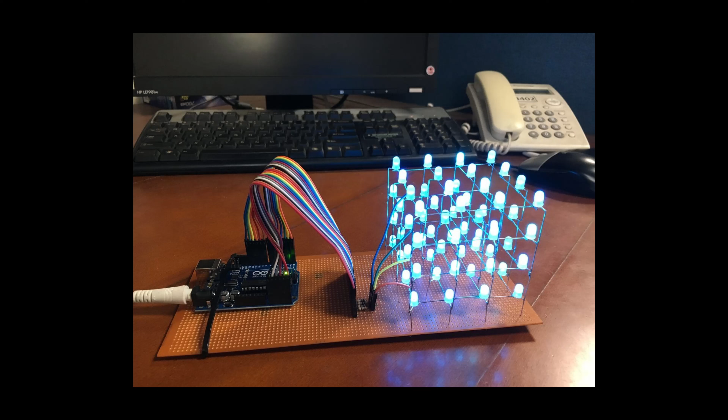So now we skip ahead to the early 2000s, and we look at the emergence of the maker movement. With the beginning of the RepRap project, as well as laser cutters and CNC machines actually being able to be placed inside your garage for us mere mortals to buy, suddenly the maker movement began. I'm not even talking about Arduino processors and being able to code your own little chips.

But with that, there was a vacuum: we are able to produce all of these things, but how do we sell them? Before, you sold to your local community, but these days the local community looks outwards, they look elsewhere to buy, so it's much harder to reach only local communities. How do you reach a global audience?

This is where in 2005, Etsy took over that vacuum and provided a platform for actually selling the products you produce in your garage. For those who don't know what Etsy is, it's a platform on which you can sell stuff - stuff that you produce, draw, cut, make, design, whatever. It's super decentralized, and you are your own factory, basically.

For years, Etsy has been a place where creators sell their handmade and unique products, helping small makers turn their crafts into actual real businesses. But it also came with a lot of cost and work. Making every item by hand is really tedious. Managing orders is hard, and dealing with shipping requires a lot of effort. All of this put a lot of strain on the designers.

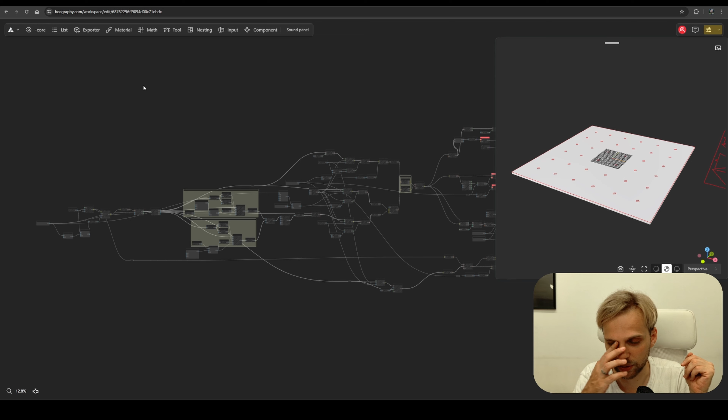You as a designer, what do you do? So if I go to the editor, I have one design right here, and it's a sound panel. You can actually hear that the acoustics in my office are not great, so I just decided to design a quick little sound panel. I'll guide you through the whole process here, but this is how it looks like, right? That's the script, that's the logic, and that's the output.

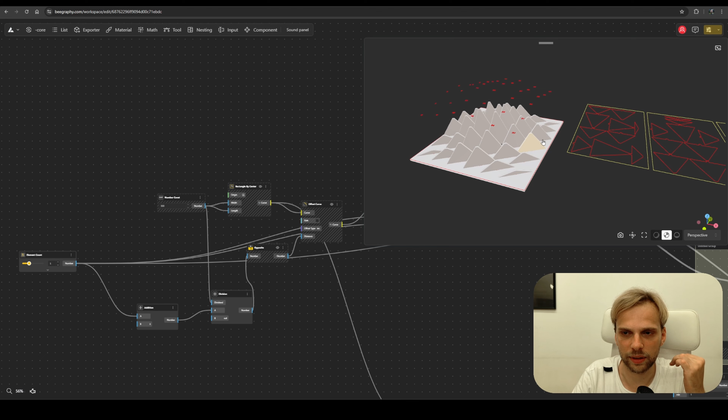So if I look at it here, these are all of the different parts, right? These are all of the different parts that are ready to be laser cut for the panels. And there are a few things that I can change.

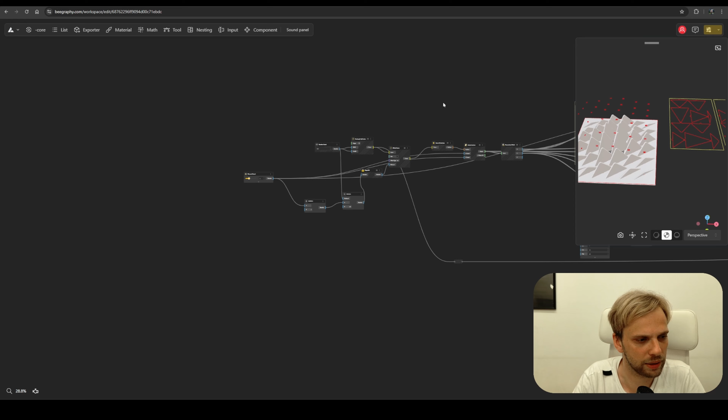Before I show you how the product would look like, I'll guide you through the script really quickly. I'll probably just place the link to the script in the video description below, so that anyone who has a login for this platform will be able to see the script, and dig through this mess that I made.

But basically, all I do is create a rectangle, which I divide up, and actually let's do a stupid thing, and let's hide everything. And now I won't be able to know what's where, but that's fine.

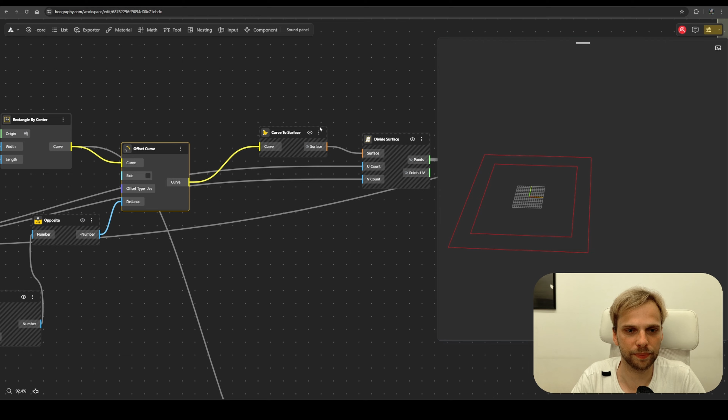So I make a rectangle, I offset it inwards, I create a surface from the offsetted rectangle. I divide the surface into a grid of points, and I deconstruct these points into their x and y axes.

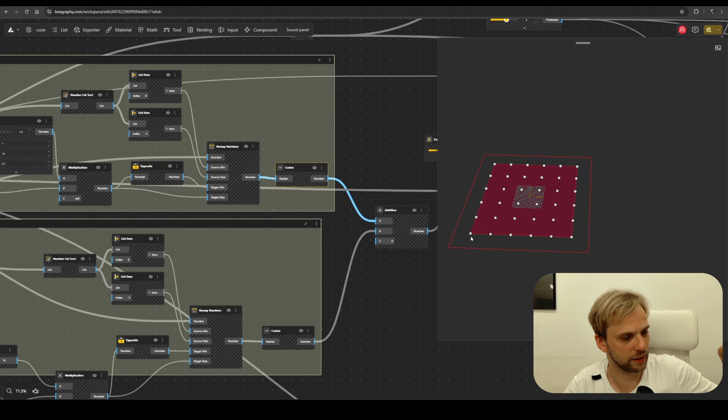And the reason why I do that is because as the points are moving further away in the x or the y axis, I run it through... where is it... a cosinus wave function, right? So I basically remap the numbers that I have here, this range of numbers, to be a cosinus. You know the wavy line, we do the wavy line.

And I add up these cosinus waves in both x and y direction into one number, and I use that number to produce a z vector, an upwards vector, with which I move the points up. And I get a little hill thing.

Then some shenanigans right here where I draw a line that I can't see. What the hell? Oh, my bad, the line is pretty small. It's right there at the top, hope you can see it.

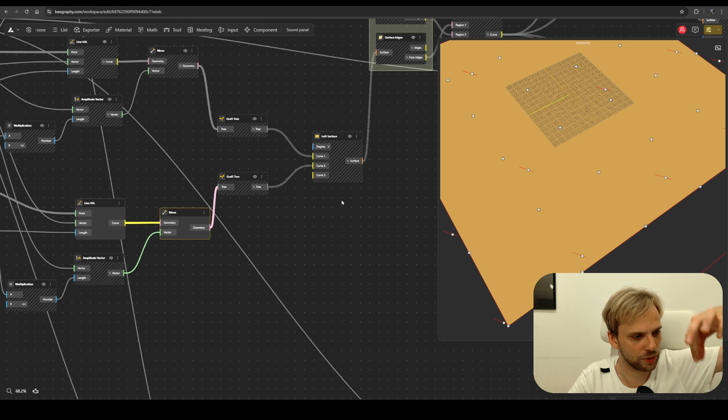I draw a little line, I move it to be in the center, in the middle of the point. That's going to be the tip of the triangles, the fins, right? And at the same time, I draw a line at the bottom, also move it to the center, and I loft between them, right? So I have this little pyramid.

Once that is done... I guess I could talk about this. No, let me just explain it right here.

I also make little rectangles so that I can place them inside of a plate, right? And the problem is that I have one region here, and two parts. I actually want this to be one shape, one outline. So what I do is I use region union to union them together into one.

Let's hide a bunch of stuff that is in the way. There we go. So I have my region union here for every one of these, so I have my elements. Great, those are ready to be laser cut.

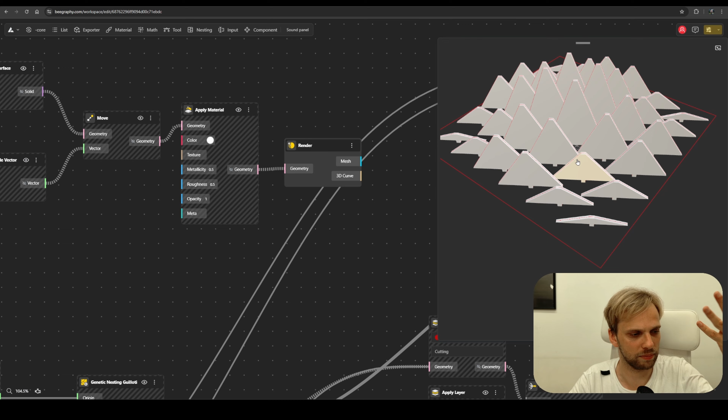Well, not really, they need to be placed flat on the ground, right, to be laser cuttable. So I'll end with this part here, just showing the elements in their correct place. It's basically just extruding the surface, like thickening up the surfaces, and I believe capping them. No, it caps automatically, never mind. Okay, so that is one part.

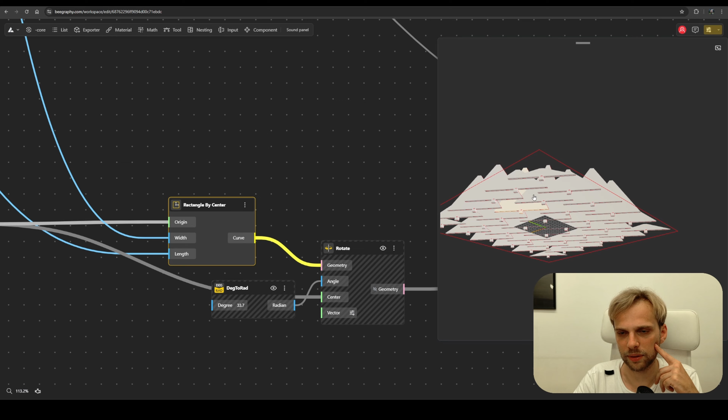Second part is me taking a bunch of rectangles that you can see right here. Actually, I kind of need to hide this, apologies. Hide that.

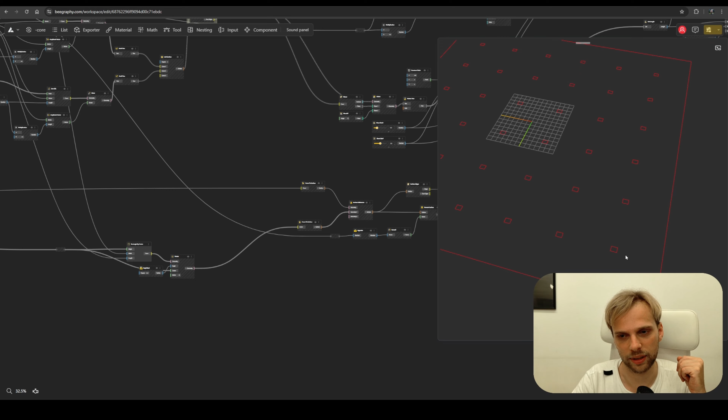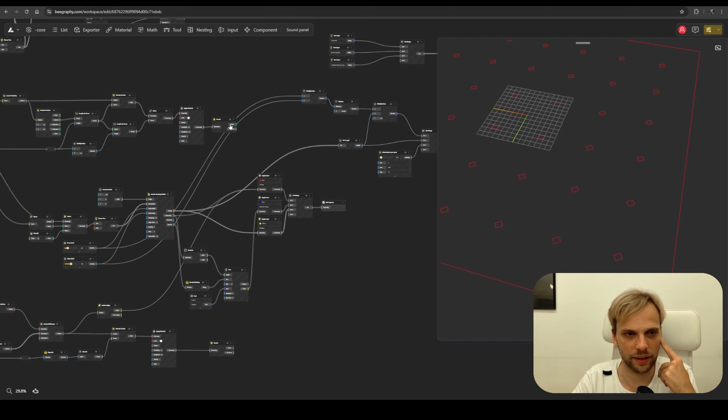Hide all of those. As I said, browser-based stuff is not that fast, but it's chugging along. So here, for every point on which the little triangles were sitting, I also make a little hole, and I make sure that it rotates exactly the same amount as the triangles, or the elements, were. Notice this rectangle rotating, and bam, it aligns with how the triangles are rotating.

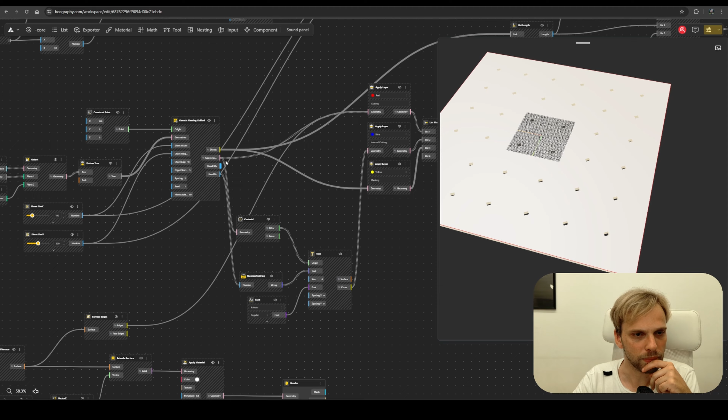With that done, also some extruding shenanigans, and at the end I have my Swiss cheese plate. Let me hide unnecessary stuff. There we go. So that's two - I have my base element and I have all of my elements right here.

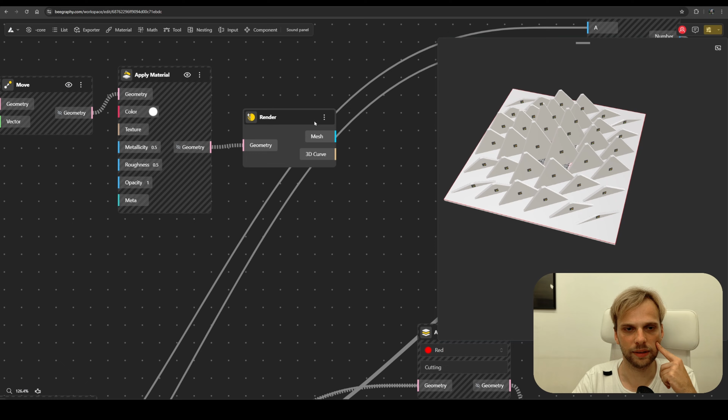Then what I do is I take the curves of the outlines of the triangles, get their planes, and orient them to the world XY plane. If I hide and render here, and hide this, you can see this is basically all of the elements just placed on top of each other on the world XY grid.

And then where am I? Hello, I'm lost. Oh yeah.

And then I just use a nesting tool, which actually is available as a plugin to the general editor, which is amazing. So now you are able to actually produce plugins for the editor itself. In my opinion, these kind of platforms live and die by the community and the plugins that the community are able to produce.

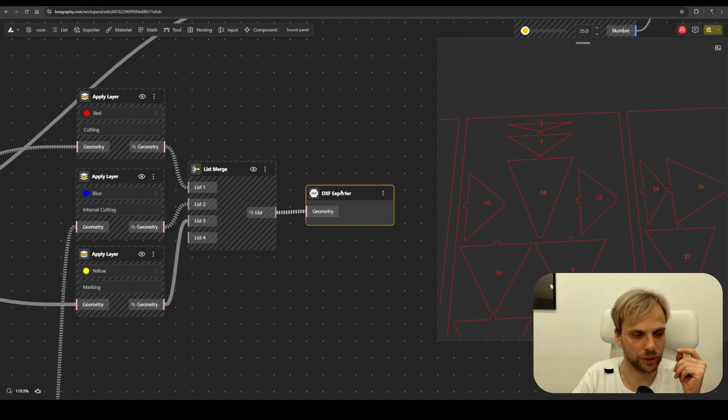After nesting is complete - it's a very basic, bounding box based nesting tool, but it does the job - I also produce numbers for every element, placed into a different layer. The cut layer is red, the internal cutting layer is blue, and the marking layer is yellow. All of that feeds into the DXF exporter, which I'll talk about later - this is basically you determining what can come out from your model, and that's the DXF file, the laser cut file.

Okay, let's hide that. I believe that's kind of it. The last bit was for every element, I also place numbers above it so we can see which element is where - element 0, 1, 2, 3, 4, 5 - just so it's easier for us to assemble them.

So now if I want to look at how this whole script would look for a user, a client, a person who wants to purchase this design, I can go to this - I believe it's under demo, because configurator - first let's talk about configurator. In the configurator, I enable or disable inputs that I want the client to have access to.

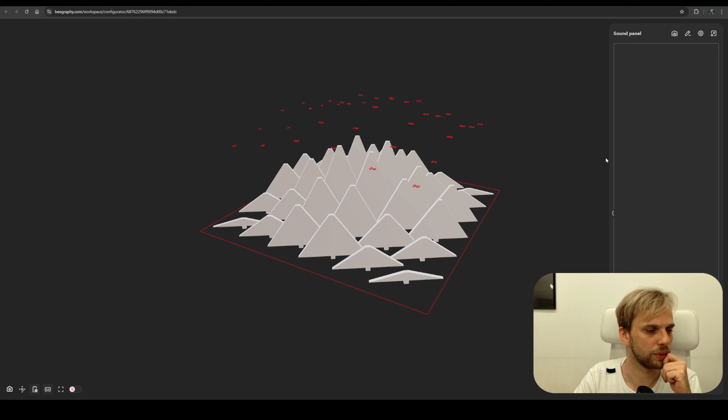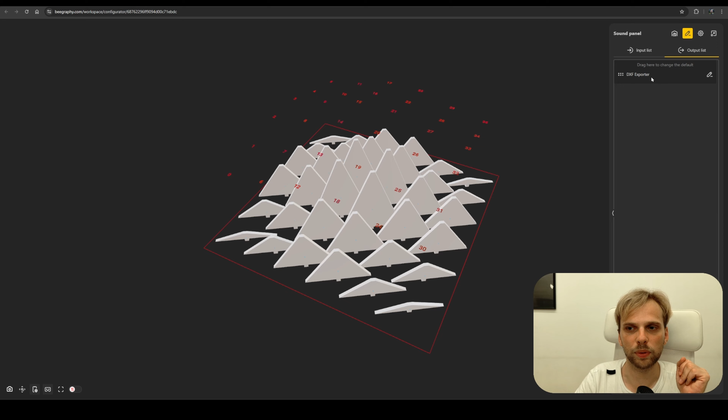So here, it's still loading. No, it's not. Here are all of the different inputs that the client has access to, and I can choose to enable or disable some of them. In this case, all of them are already set up, I don't want to mess with that. There's also an output list, which is one DXF exporter. Oh, I also forgot - actually no, I'll mention that a bit later.

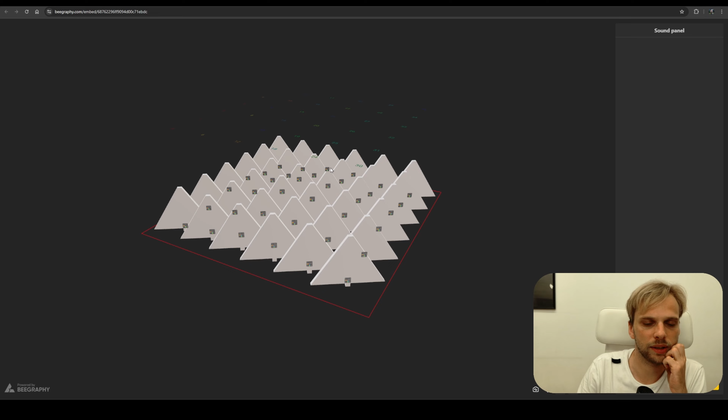So then what the client sees is this demo thing. Let's wait for it. You can notice that whatever you have enabled as a preview in your script also shows here for the client. So this is maybe not the best.

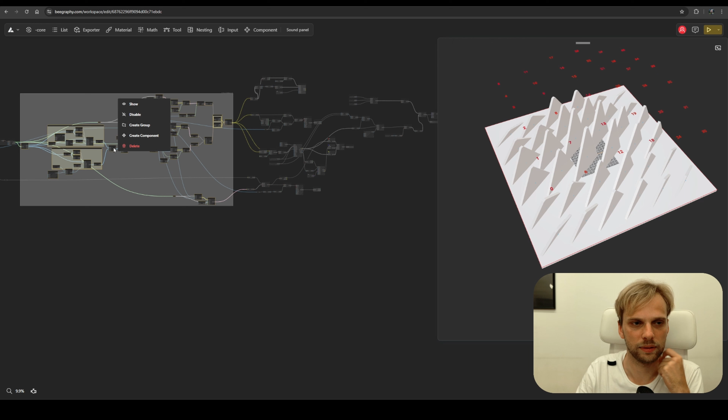I actually need to go back in here and enable the render preview of the bottom and disable - apologies, a bit laggy. Oh, did I? Oh, I accidentally enabled all of the whole damn preview. Okay, good, a bit more. Okay, whew. And then we don't need to really see that.

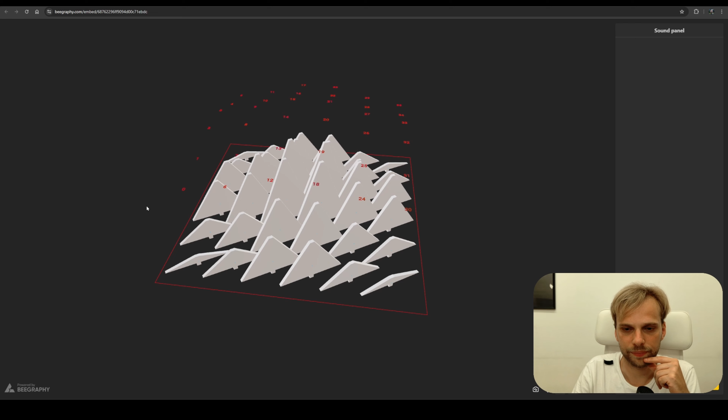Texts currently in this current state are really heavy, so we don't want to preview those. Back in here, if I refresh the web page, you'll see that a cleaner version of the geometry is being shown.

And if I were to click on the download right here, you can see that the DXF exporter is right here - that's the node I was talking about. Where is it? Right here. That's the only output that the client can get. And if I click done, then the file gets downloaded.

I'll show you the file in just a second, but right now give me a second - I will need to figure out why the inputs are not showing up. Also, I actually need to hide my camera and show you again. Download button was here, DXF exporter. I clicked done, right? Okay, let me investigate.

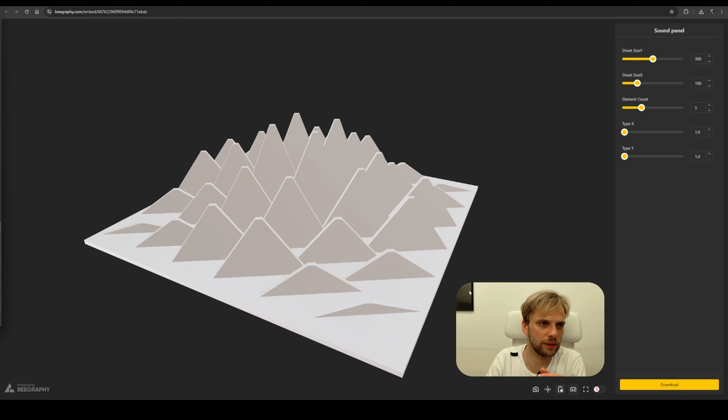I figured it out. Let me make this smaller. The problem was that if you hide your sliders, your number adjustments, inside of your script, then they will be hidden in the sound panel too, which is strange, but hey, it behaves this way, so we follow the rules.

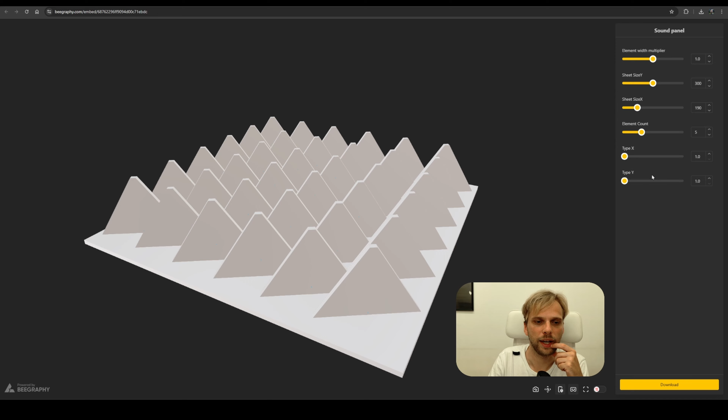Either way, we have ourselves a bunch of things that we can change. For example, if I simply go for the element count - give it a second, because of the nesting logic - or 3 divisions, not elements. Because of the nesting logic, it's actually a pretty heavy script, but seems to be working quite well. If I want more elements, I can. Let's go for 8 - I don't want to do like 12 elements, it's going to take too long.

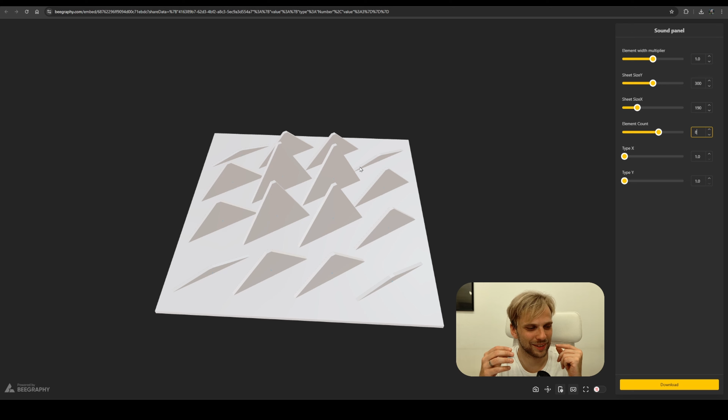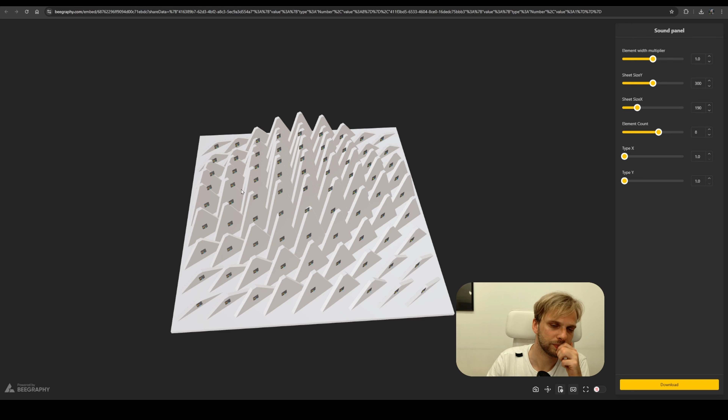So now let's give it some time to catch up. You can see the step-by-step script being run, and how it calculates, eventually converging on the final design. There we go, so that's our 8x8 sound deadening panel.

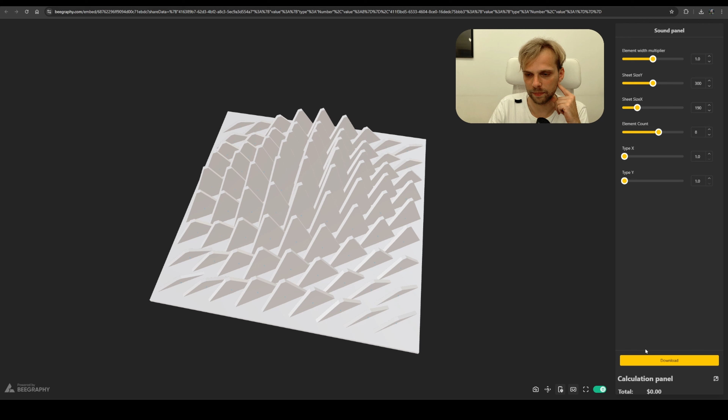Now here in the bottom left and bottom right there's a bunch of settings and icons. The one I want to talk about is this icon right here, the calculation panel. This is soon to come, in a way that you will be able to assign a material and material cost to this model, and the calculation panel will give you the rundown of how much it's going to cost.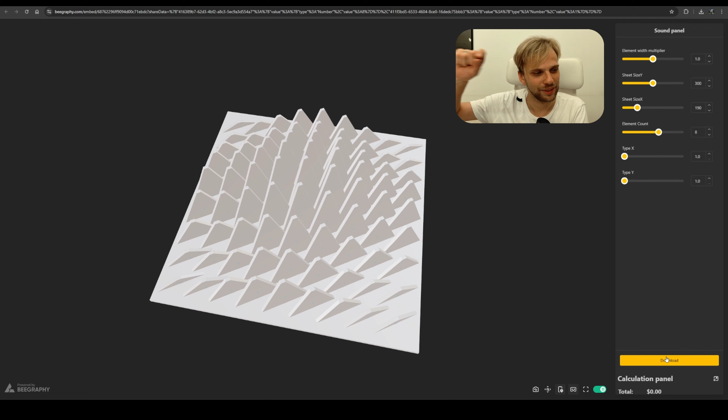The marketplace will automatically update the cost according to the type of design that you make or that your client wants. I think that's one of the last things. The last thing would be to bridge the gap between this download button and the file actually being sent to a makerspace near the client's location, for them to produce, package, and ship the model to the client.

So now, since the calculation panel isn't running, I'll show you a quick workaround. The workaround is right here - the display table, this bad boy right here.

If I enable the preview of it and refresh, give it a second... there we go. And once it calculates - yep, there we go. That's the total area, how many sheets are required, and material price per square meter.

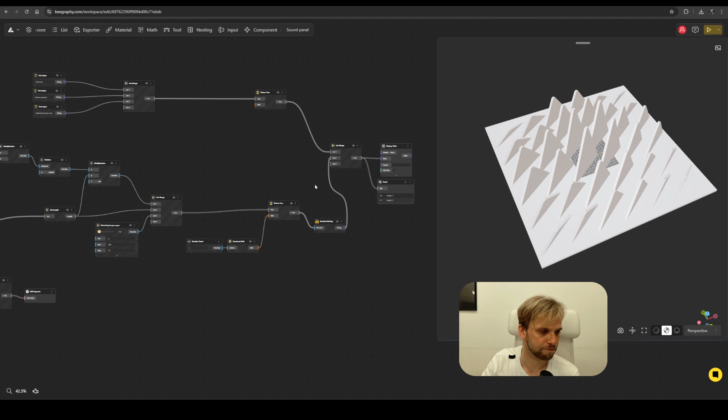What's the cost for it? All of it is running through this logic of building up the table. Right now it's a workaround, but in the future you won't need to do this kind of stuff because it's all going to be in the calculation panel instead. There are plenty of tutorials by Beegraphy themselves on how to use this.

All right, so finally we're at the stage where I can actually make the thing I've been talking about making. We always make things on this YouTube channel. So now I'm going to play around with the settings for this, and try to find a nice little...

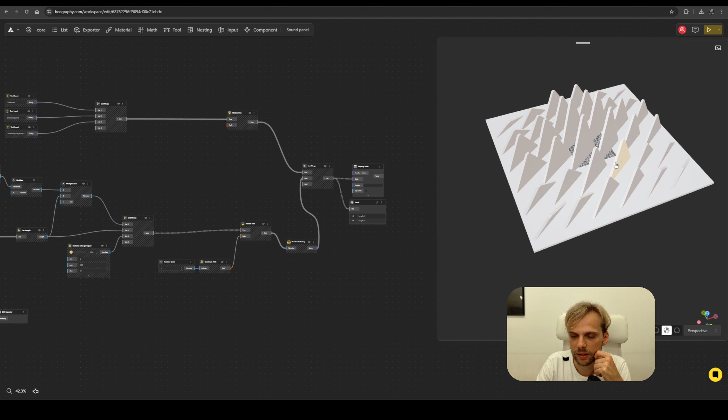Now we're going to play around with the settings for this. I'm going to try to find a nice amount of elements that are still producible, with correct thicknesses and so on. Once that's done, I'll show you the final design in a nice way - I'll get my nice camera for it.

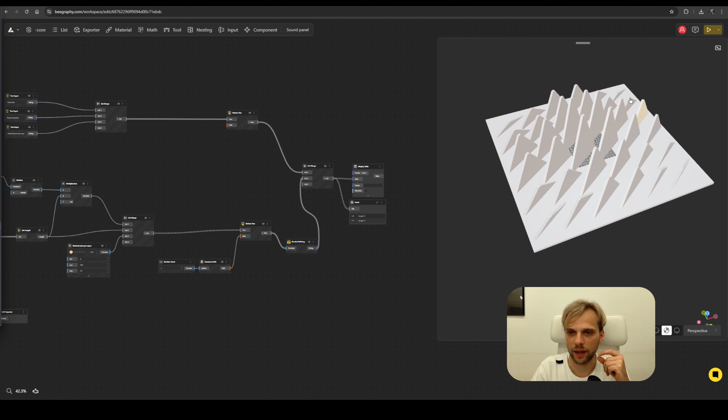Before we do that, let me show you the export that we had from here. One second. There we go, I'll show it to you in Rhino - I have it on my second monitor. If I just drag and drop it in, I'll open the file. Yeah, hit OK, and you'll see this.

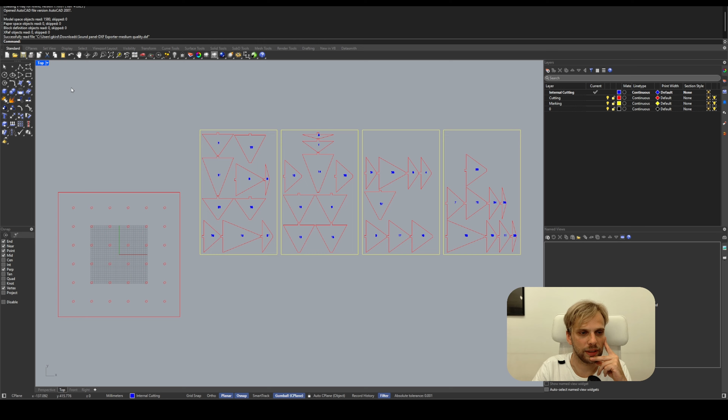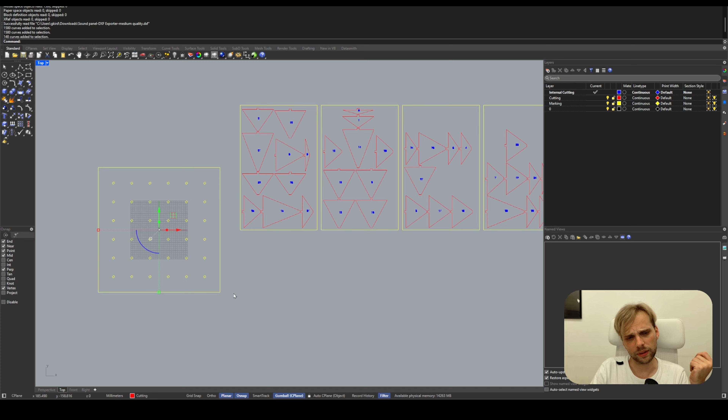This is something that a manufacturer, like a person with a laser cutter in their basement, would receive, with a side note of the address to which they should ship, and I guess the assembly instructions. So this is the base plate, and these are all of the different elements.

Honestly, since this is a bounding box based thing, I'll most likely manually arrange them a bit so they fit in 3 sheets rather than 4. But besides that, this is production ready - all of the layers are correct and so on, ready to go.

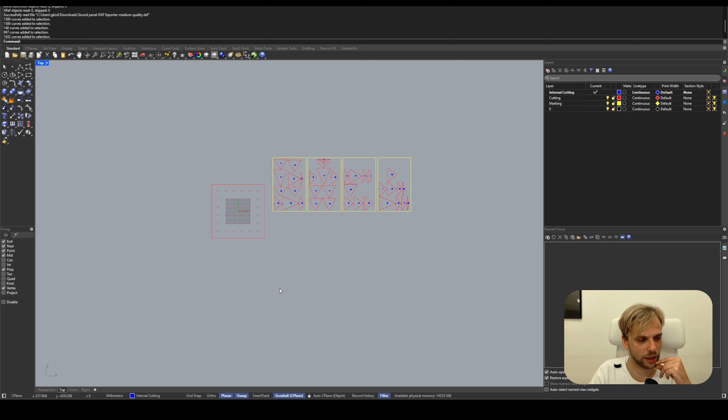I'm quite surprised how seamless this is at this stage of development, and I'm curious to see where it goes next. So now, I guess I'll leave you with this.

The customization of manufacturing is close - it's already here, honestly. It's just a matter of convenience and connecting people, finding platforms that connect clients with manufacturers, clients with designers, designers with manufacturers, and so on - an in-between platform. I do believe Beegraphy is definitely one of them. They're not the only one, but they're the one pushing quite aggressively, and I like that quite a bit.